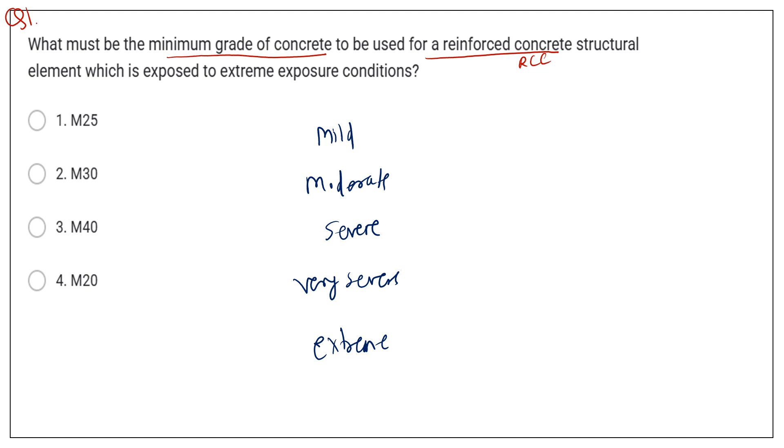In case of mild condition, M20 grade is used. In case of moderate, M25. In case of severe, M30. In case of very severe, M35 grade is used. And in case of extreme condition, M40 grade is used. So here M40 is given in the third option. So this third option is correct here.

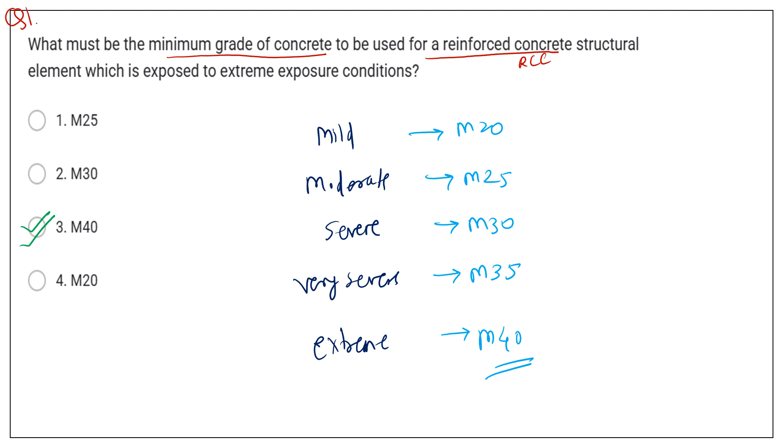Then these are a few tables for more information. In the question they ask about only RCC, but these are the grade values for PCC. Then the nominal cover, then cement content, minimum cement content and maximum water cement ratio for PCC and for RCC. Okay, then next question.

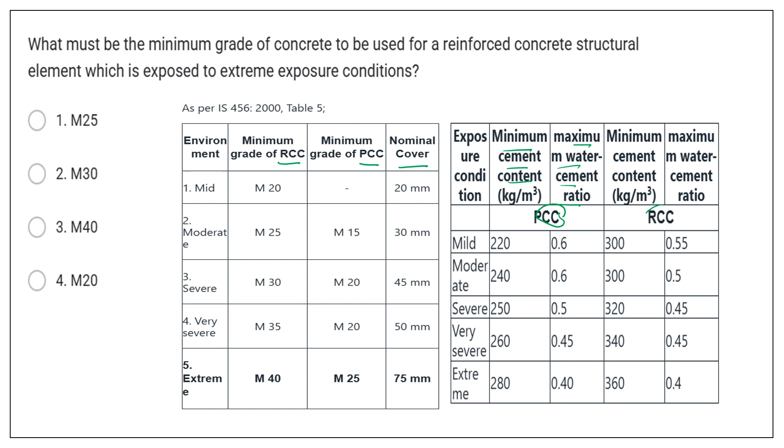Second question: consider the following strengths of concrete: cube strength, cylinder, split tensile and modulus of rupture. Correct sequence in increasing order of these strengths. For this there is one equation: cylinder strength is equal to 0.85 times cube strength. By observing this equation we know that the cube strength is larger than the cylinder strength. So for increasing order, first cylinder strength comes and then cube strength.

But in the first and second options, they mention cube strength first, then cylinder strength, meaning options one and two are wrong. But in options three and four, B and A are in correct arrangement: cylinder first and then cube strength as per increasing order. Then between split tensile strength and modulus of rupture, split tensile strength gives lesser strength. Always remember that. So here C is first, then D, B and A. This is the correct order, so option three is correct.

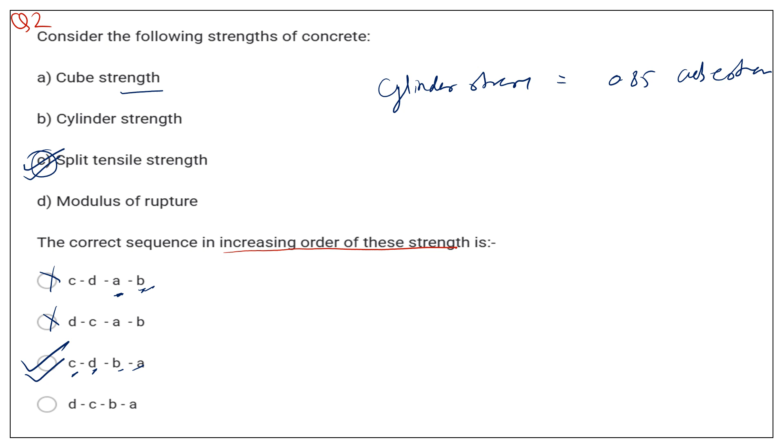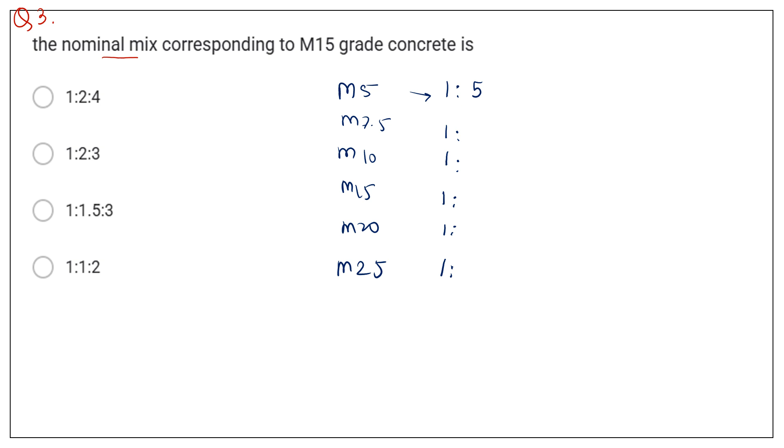Then question number three: the nominal mix corresponding to M15 grade concrete. For nominal mixes there is one table, and the values start from M5, then M7.5, M10, M15, M20 and M25. There is one trick to remember the nominal mixes. First write 1 for each grade, then write from 5 in decreasing order: 5, 4, 3, 2, then 1.5 and 1.

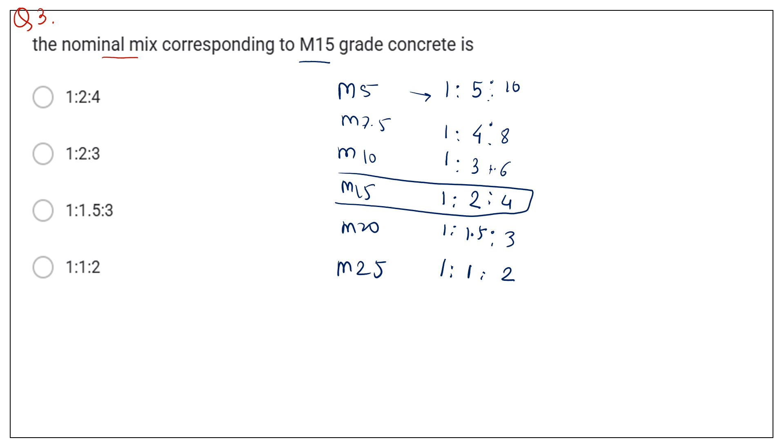Then double the values like this: 5 doubled is 10, 4 doubled is 8, 3 twos are 6, 2 twos are 4, 1.5 into 2 is 3, and 1 into 2 is 2. So these are the proportions for the grades of concrete. Here they ask about M15 grade, and for M15 the proportion is 1:2:4. So option one is correct. The next question.

Fourth question: the maximum spacing of shear reinforcement as vertical stirrups measured along the axis of a reinforced concrete beam of width 300 mm and effective depth 500 mm with span of 6 meters is? For shear reinforcement there are two conditions. First, spacing of shear reinforcement should not be more than 0.75d, where d is depth. And if this is more than 0.75d, take the spacing of shear reinforcement as 300 mm.

Here the depth given is 500 mm, so we'll put the given value into the formula. The spacing of shear reinforcement should not be more than 0.75d. So 0.75 into 500 is nearly equal to 375 mm, but this value is more than 300 mm. So because of that, we'll take the spacing of shear reinforcement as 300 mm, which is given in the first option. So here the first option is correct.

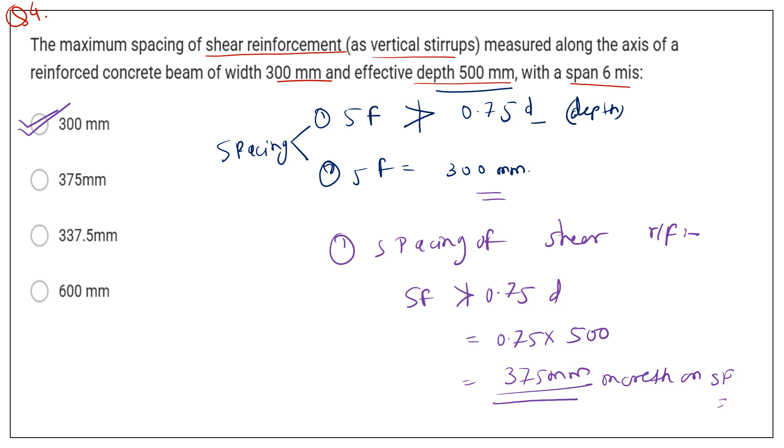The next question, question number 5: the minimum eccentricity to be considered for an axially loaded RCC column of size 400 mm by 400 mm with unsupported length 5 meters.

So for minimum eccentricity, the formula is unsupported length divided by 500 plus the size of column divided by 30. Here the unsupported length is given in meters, so convert it into mm: 5000 mm divided by 500 plus 400 divided by 30. This value is nearly equal to 23.3 mm. So this is the minimum eccentricity, and your third option is correct.

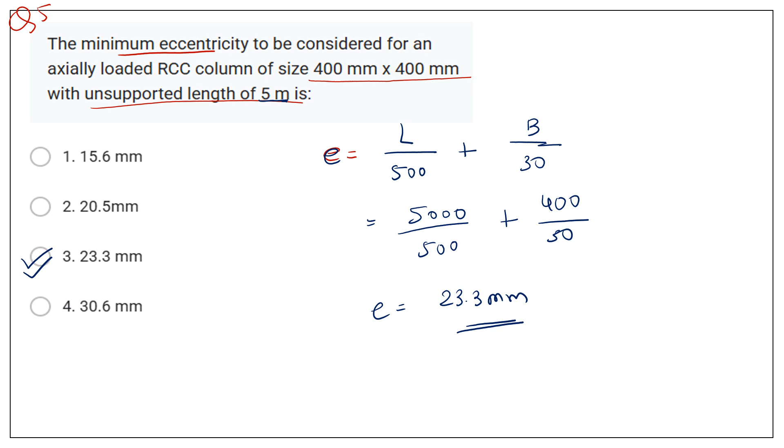The next question, question number 6. The minimum stripping time of soffit formwork to beams, props to be refixed immediately after removal of formwork. For this, the minimum stripping time is 7 days. The 7 days is mentioned in the third option, so the third option is correct here.

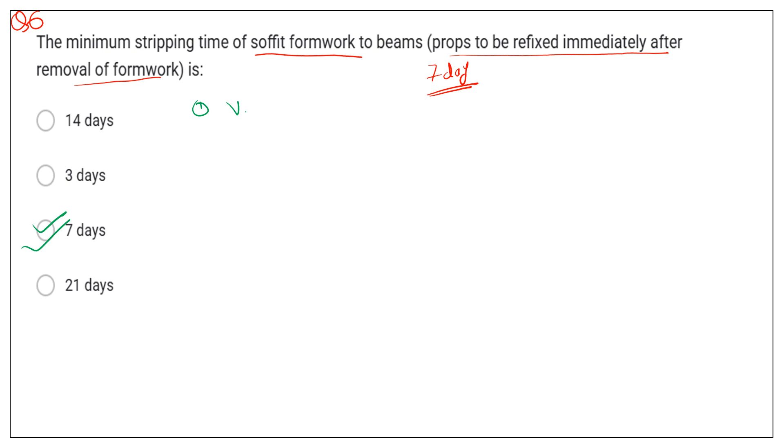But there are remaining values. First, the vertical formwork for column, beam and wall: the timing is 16 to 24 hours. Second, for slab, where props are refixed immediately after removal of formwork, the timing is 3 days. Then third, soffit of slab. Then next is soffit of beam, 7 days.

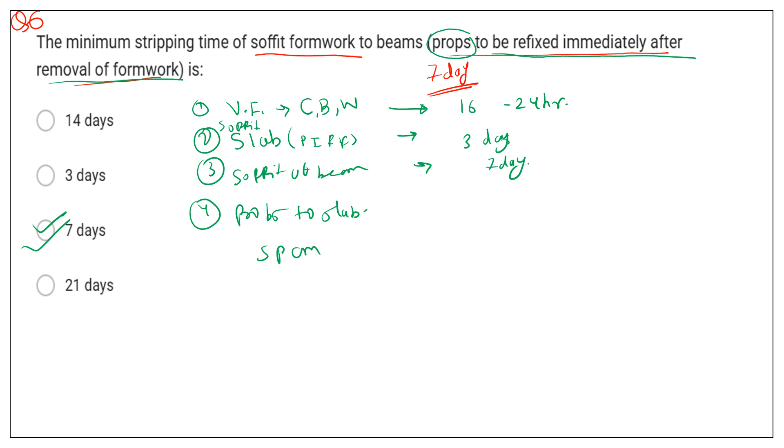Then fourth, where the props are to be refixed immediately after removal of formwork, the timing for props to slab: when the span is 4.5 meter or less, the timing is 7 days. If the span is more than 4.5 meter, then 14 days.

Then the fifth one, props to beam: if the span is less than or equal to 6 meter, then 14 days, and if the span is more than 6 meter, then 21 days. These are the stripping times. This is for less or equal, this is for more, this is for less or equal, this is for more. Here the third option is correct.

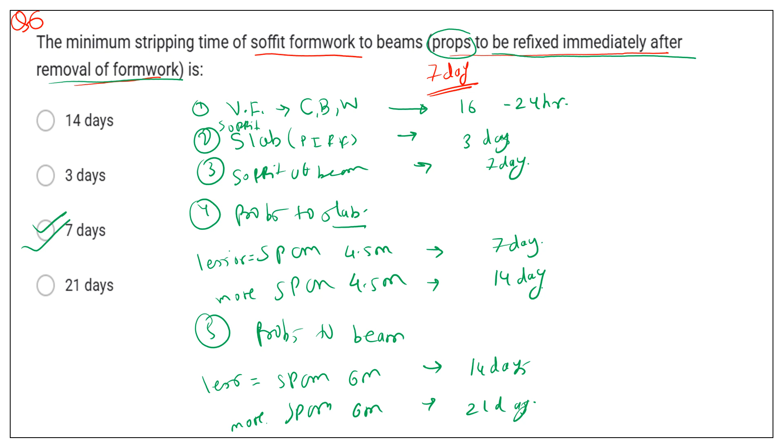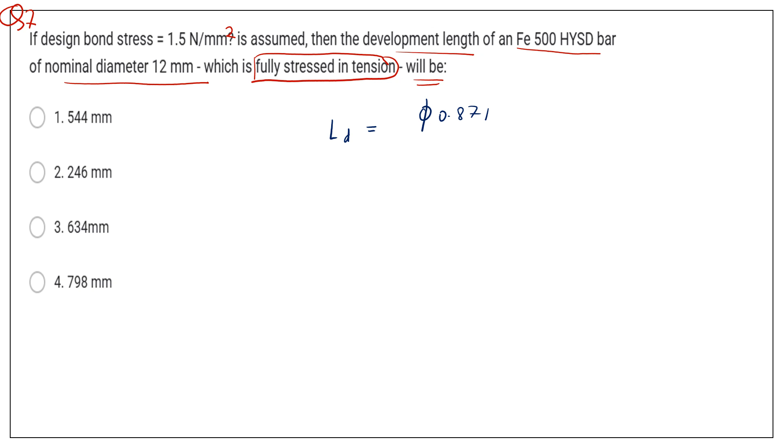The next question, question number 7. The design bond stress 1.5 N/mm² is assumed. The development length of an Fe 500 HYSD bar of nominal diameter 12 mm, which is fully in tension, will be? For development length, the formula is Ld = φ × 0.87 fy divided by 4 τbd. This is the formula for the development length.

Here the given values are φ = 12 mm, then τbd is 1.5 N/mm². The τbd in case of tension is increased by 60%, and in case of compression it is increased by 25%. So the multiplying factors are 1.6 for tension and 1.25 for compression. These are the values for the multiplying factor for τbd.

Then the next given value is fy, which is equal to 500. Put the given values into the formula: Ld = 12 × 0.87 × 500 divided by 4 × 1.6 × 1.5, because the tension condition is mentioned in the question. For tension the value is increased by 60%. After calculation we get 544 mm, which is mentioned in option number one. So your first option is correct.

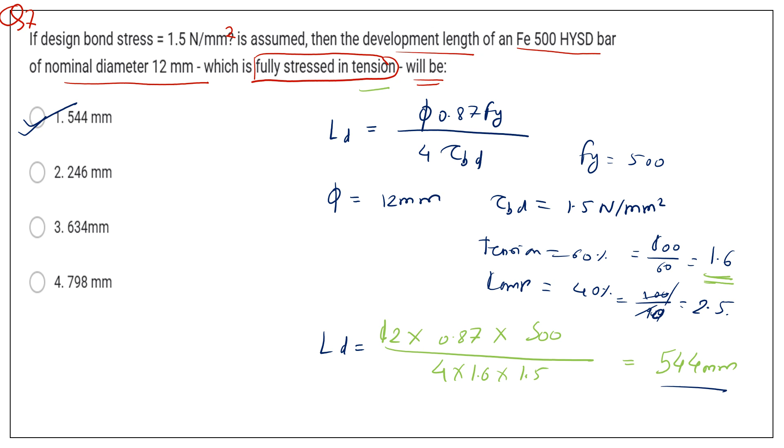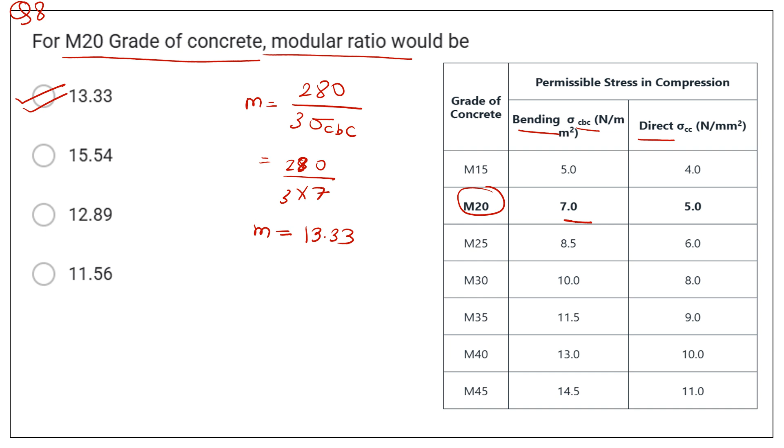The next question, question number 8. For M20 grade of concrete, the modular ratio would be? For modular ratio, the formula is 280 divided by 3σcbc. For σcbc, this is the table of permissible stresses in compression for bending, and these are the direct stresses. The value of σcbc for M20 grade is 7. Put 7 into the formula, 280 divided by 3 × 7, and the modular ratio is equal to 13.33. So option number 1 is correct.

The next question, question number 10. In the limit state design method, the moment of resistance for a balanced section using M20 grade concrete and HYSD steel of grade Fe415 is given by MOR = K bd². What is the value of K here? So first we'll discuss the formulas for the moment of resistance and then we'll solve the numerical.

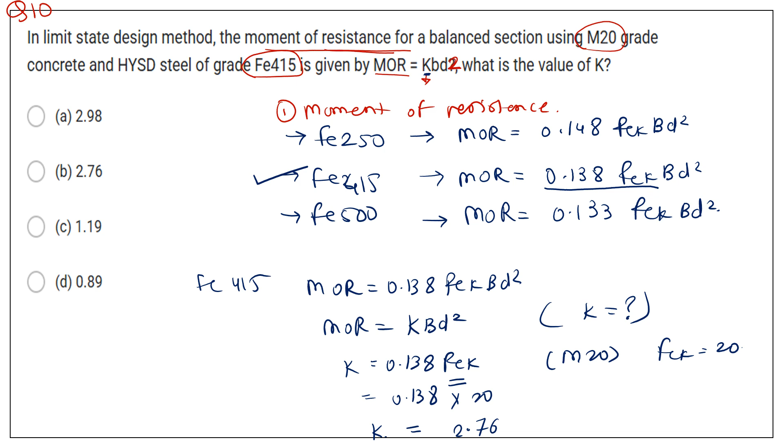The next question, question number 11. What is the minimum area of tension reinforcement in a beam when Fe415 is used? So for Fe415, the minimum area of tension reinforcement PT is equal to 0.85 into 100 divided by Fy. So 0.85 into 100 divided by 415 is nearly equal to 0.2%. So here option D is correct.

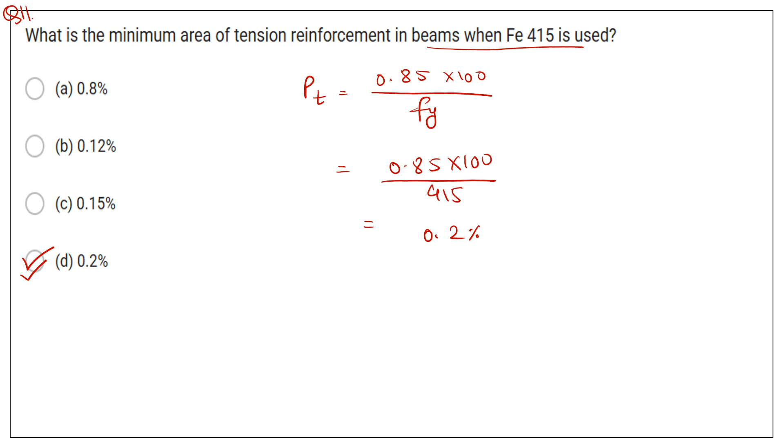The next question, question number 12. The minimum strain at failure in tension steel having yield stress Fy 250 MPa, Young's modulus ES equals 200 GPa, as per the limit state method of design. The formula for that is epsilon S equals 0.87 Fy divided by ES plus 0.002.

So here it is 0.87 into 250 MPa; convert this MPa into Pascal, which is 10 raised to 6. Then ES is equal to 200 into 10 raised to 9, to convert the gigapascal into Pascal. Then plus 0.002. So after calculation you get epsilon S, which is the minimum strain at failure in tension steel, 0.0030. So here the first option is correct.

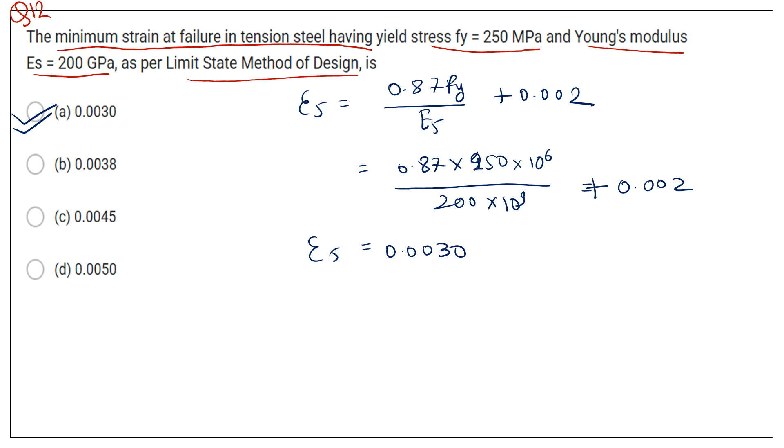The next question, question number 13. The effective width of flange of a continuous T-beam in a floor system is given by BF equals L0 by 6 plus BW plus 6 DF, where L0 represents what. So L0 is nothing but the distance between the points of contraflexure in the span. So your first option is correct.

The next question, question number 14. If Cu and Fy are the cube compressive strength of concrete and yield stress of steel respectively, Es is the modulus of elasticity of steel, for all grades of concrete the ultimate flexural strain in concrete can be taken as the third option, which is 0.0035.

The next question, question number 15. The assumption that the plane section normal before bending remains normal after bending is used in both the working stress and limit state design. So the third option is correct here.

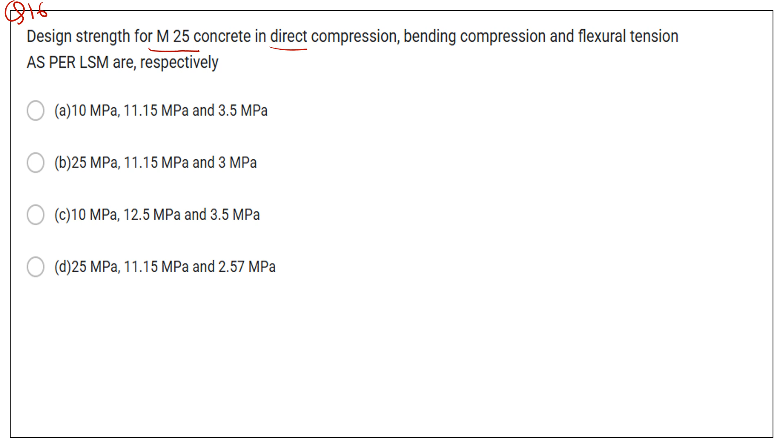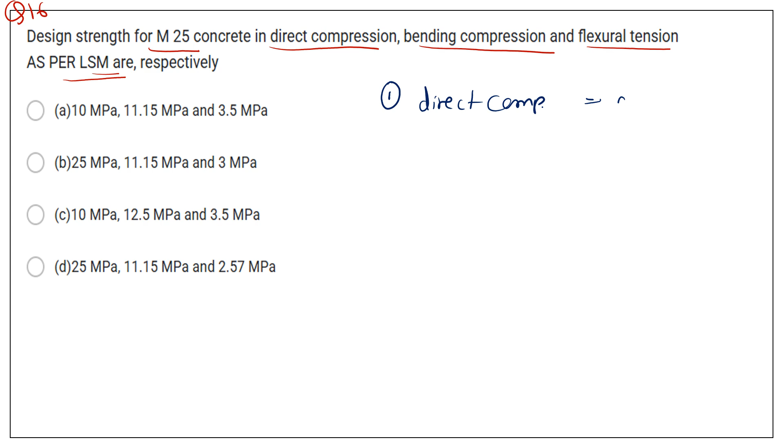Then question number 16. Design strength for M25 concrete in direct compression, bending compression and flexural tension as per LSM, the limit state method, respectively. For direct compression, the formula is 0.4 into FCK. The second formula, for bending compression, is 0.45 into FCK. The third formula, for flexural tension, is 0.7 into square root of FCK.

So putting the given values, we get 0.4 into 25, which is 10 MPa. Then 0.45 into 25, which is 11.15 MPa. Then the last one is 0.7 into square root of FCK, which is 0.7 into 5, which is 3.5 MPa. So all three are present in the first option: 10 MPa direct compression, 11.15 MPa bending compression, and 3.5 MPa flexural tension as per the limit state method.

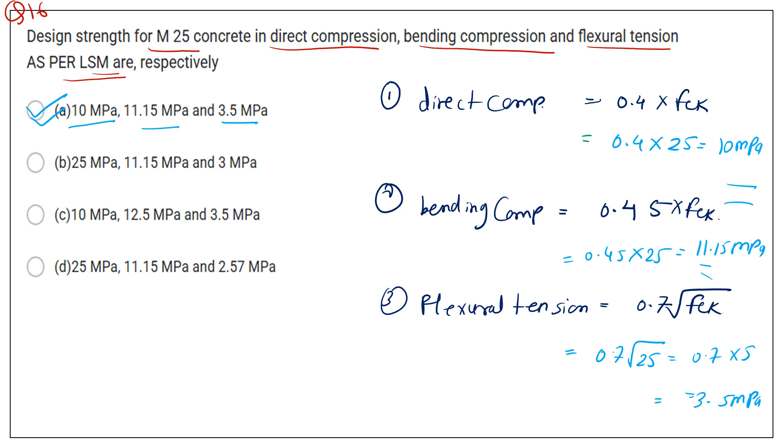The next question, question number 17. The anchorage value of a hook is assumed 4 times the diameter of bar if the angle of the bend is what. For 4 times the diameter, the angle of bend is 45 degrees. For 8, it is 90 degrees. For 12, it is 135 degrees. For 16, it is 180 degrees. So 45 is mentioned in the third option, so the third option is correct.

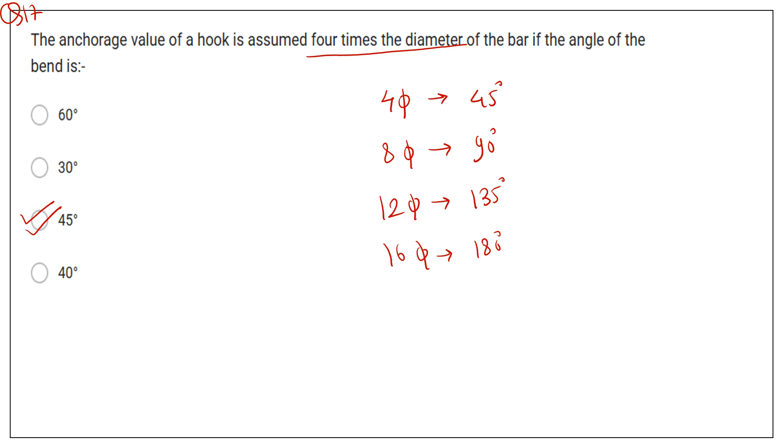The next question, question number 18. At which condition is splicing of reinforcement bars in an RCC beam required? For splicing of reinforcement in the RCC beam, the bending moment should be less than half of the maximum bending moment on the beam. That is mentioned in the second option, so the second option is correct.

The next question, number 19. The maximum deflection due to load in an RCC beam in a building is limited to what. The value is related to the span of the beam. So span by 250 is the maximum deflection due to load in an RCC beam. The second option is correct.

The next question, the last one, question number 20. In a simply supported slab, alternate bars are cranked at what. They are cranked at 1/7 of the span or 0.15 L of the span. These are the two values. In the question, 1/7 of span is mentioned, so the third option is correct here.